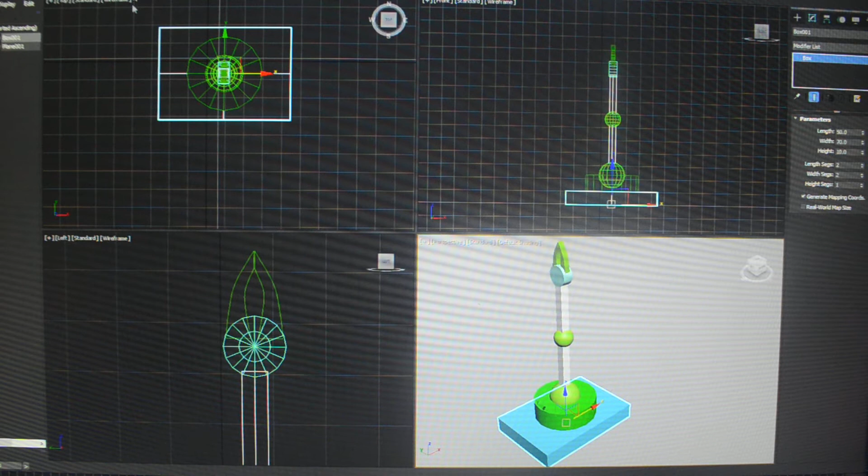Okay, so I fixed this, so now when I move the base, the whole thing moves. And all I did was I just selected this one, mirrored it, and kept it as a copy.

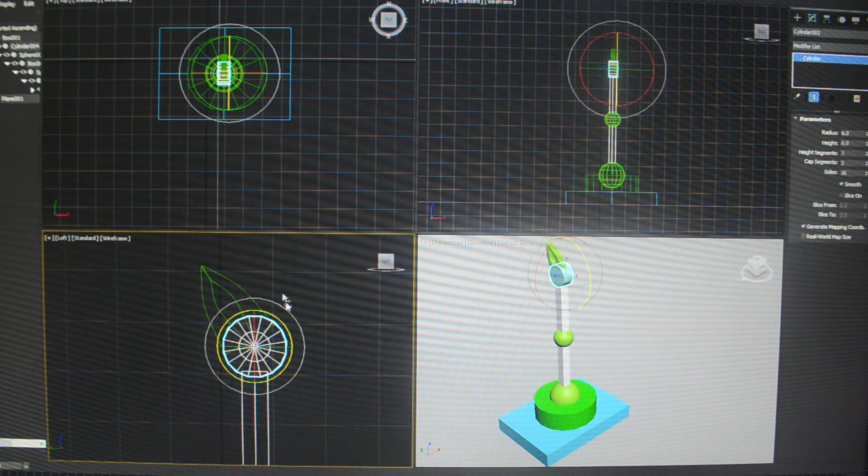Okay, so now that I have all of these connected to each other, I can move my fingers independently of my hand. So I can move the fingers like this. However, if I move the hand, the fingers come with it. And if I move the upper arm, it takes the hand and the fingers with it.

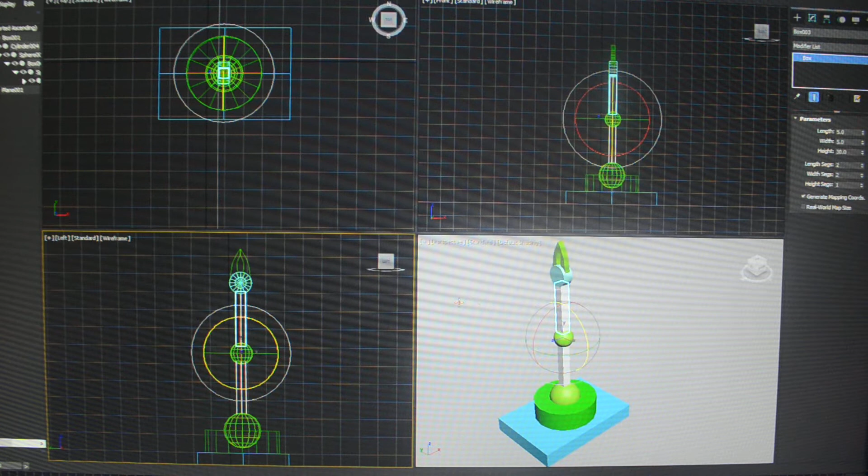And that is how I have rigged a system to create a functioning part. Now, this is not at all unlike your literal body, and I was using the term fingers and hands to make that analogy on purpose. You can start to look at things that way. So, for instance, my fingers move on their own, and my hand wiggles, but it stays in place. If I move my hand, I take my fingers with it. And this is exactly how this works, and this is how you want to link things.

You want to start with your fingers or your toes, link to the hands, your toes to your feet, your hands to your upper arm, in this case we have a ball joint, your elbow to your upper arm to your shoulder to your body, your torso. And that's literally how you're gonna link things in systems like that. You're going to start with a thing that moves independent of everything else first, and then link in succession down the chain, until eventually when this is finally all linked down the line, this comes with it.

Okay? So let's do a little bit of animating with this. It's tough. Don't beat yourselves up too much in the beginning when you start learning how to do this. You're going to have to get comfortable with playing around with it until you start to feel more comfortable with it. And you, like with anything, y'all know by now how I feel about this. The more you practice, the better you get at it.

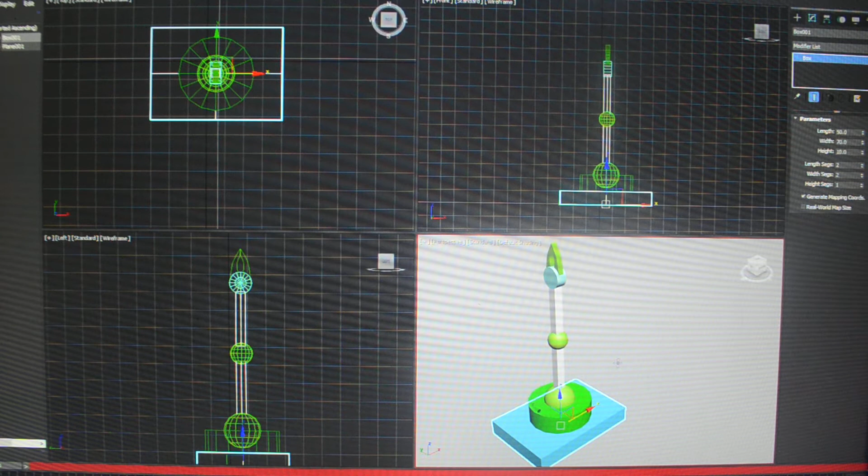So this is what I'm going to do. I'm going to turn on my auto key. And actually, well, I'm going to need all my views. Let's turn on my auto key. And I'm going to set a keyframe so that everybody is right here. Okay, so the first thing I want to do is I'm going to move to, let's say, frame 10.

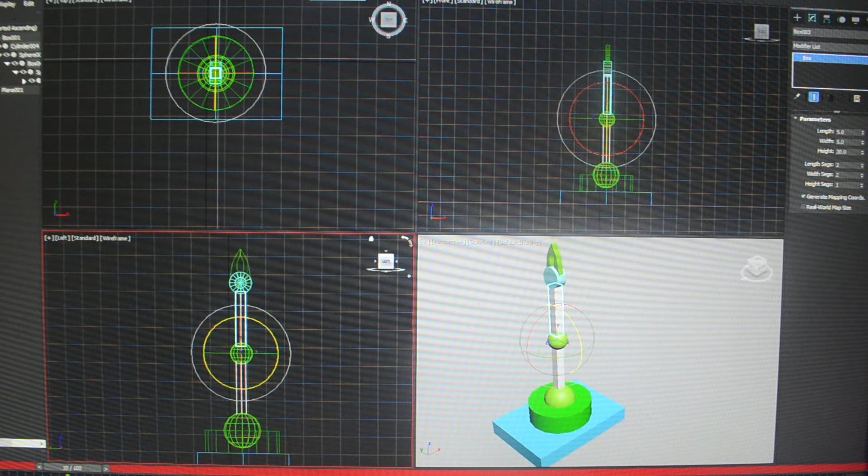Now, a word about incremental snapping. You can also turn on your angle snap toggle and it will allow you to rotate by 5-degree increments. I recommend you always work with this, because if I ever want to return this to its upright and locked position, I know that I can do it more easily by working with those perfect angles. If I just rotate this and later on I want to rotate it back, it's going to be virtually impossible to remember what I rotated it to in the first place randomly and then to get it back there without doing some math. So turn on up here your angle snap toggle and work with those snaps, okay?

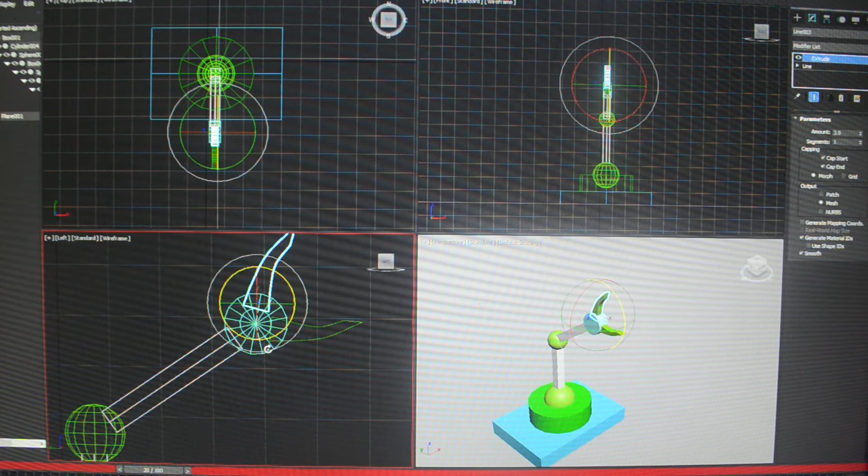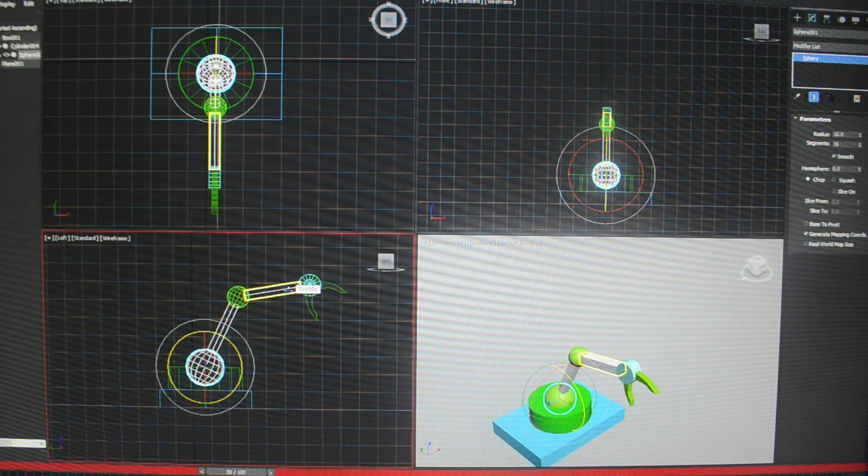So right there for 10, and then I'm going to move to 15, and at 15 I'm going to rotate open my jaws or claws, whatever you're going to call those, pinchers. And then at 20, I'm going to select my hand and rotate that down. And I'm also going to rotate this sphere down. And then at 30, let's make some more rotations. Rotate this further down, and rotate this further down.

And you see I could grab something if it was there. Straighten this back out.

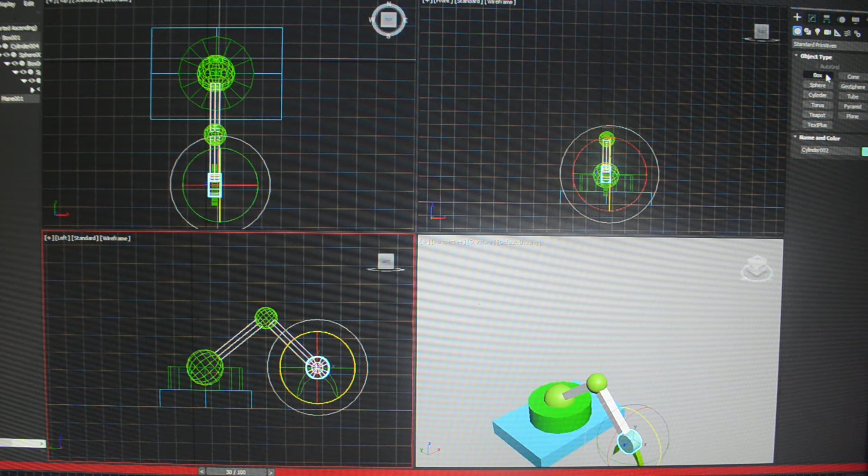Let's just do... oh, I couldn't find a box. Right, you can do a box.

You can now pick this up. Most people put the box there first. I put it there after, because it's a lot easier to put the box in now than to try to put it in later.

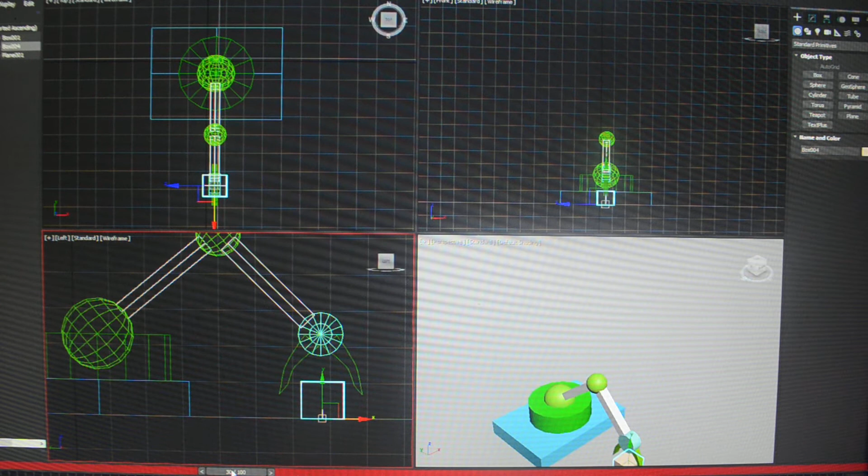Okay, so now, where's my box? I'm going to move it to here. I'm going to rotate those pinchers closed on the box. And don't worry if you go inside—you want to go inside the box a little bit. It's okay, nobody will know that you did that.

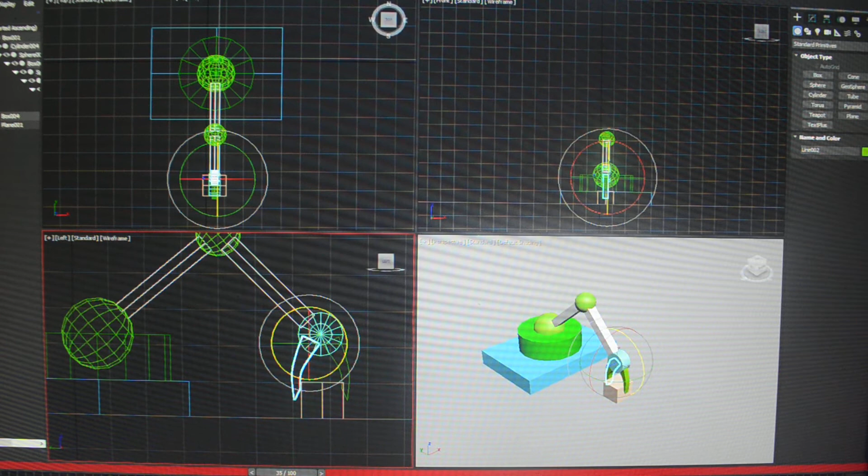It's more believable that it's like pressing the fingers than if you leave a gap. Okay? So that allows me... I'm going to turn this off, go back, and then play that through this animation.

Stop selecting that, scale this up. Whoops, wrong one. There we go. Okay, now let's watch and see what we've been able to do here.

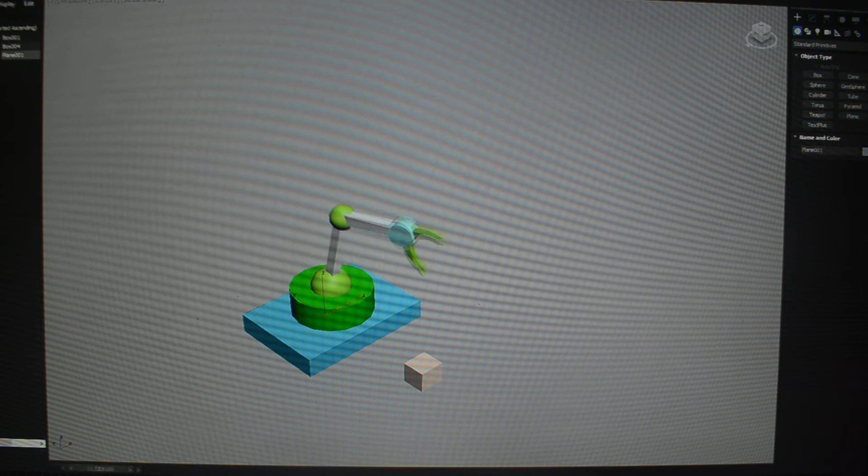Okay, so that is a rig. That's what a rig does. We can now use other techniques using link constraints to pick this up, and I'm actually going to show you in another video how to do link constraints. For this one, we're just focusing on how to set up the rig and how to then animate that rig. But this is considered a rig without bones—we didn't use any bones in our rig.

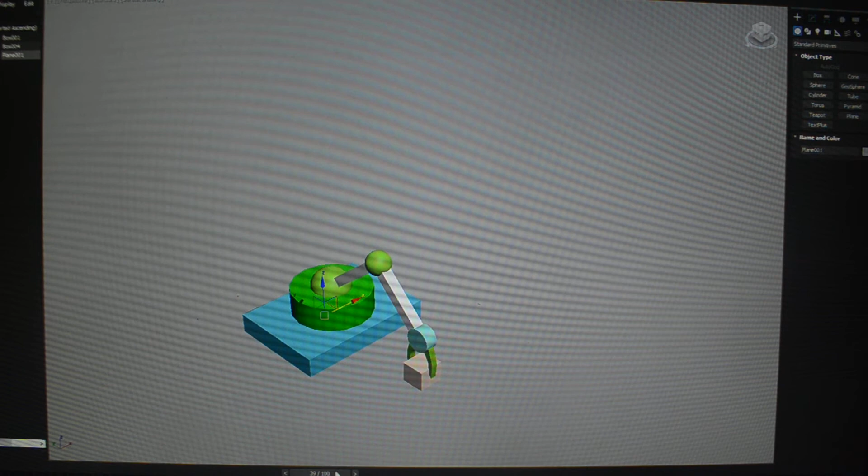Now, here's what I want to focus on in this video. I may not be happy with some of the movements, and if I'm not, I can make adjustments to those. So let's just say I'm going to incrementally move forward, next frame.

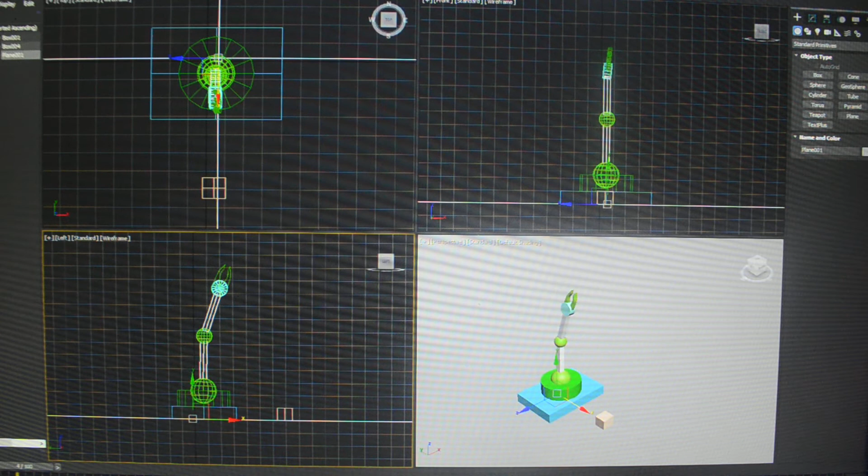Okay, and so I say at some point that maybe I felt like this needed to be adjusted or moved over—see, I'm on 20. Maybe it needed to take a little longer to get there. So I'm moving my keyframes around to smooth out, slow down, or speed up.

Remember, if you move it to the left, you're speeding it up. If you move it to the right, you're slowing it down. So if you're looking at the movements on your object and you're saying, okay, maybe that part is moving too fast, I want to slow it down—go in, select the part, here are your keyframes, shift it to the right. It's going to slow it down for you.

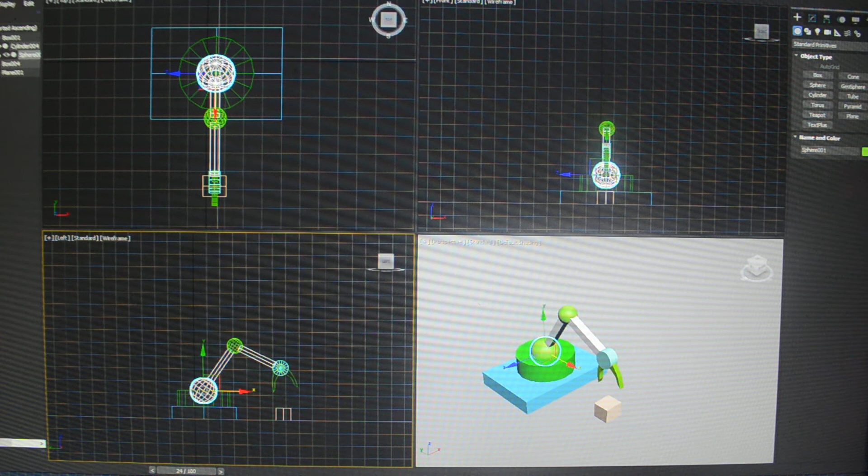Of course, oops, there we go. So it slowed down a little bit towards the end. It went quickly into motion, but as it got closer to the box, it slowed down because I moved my keyframe to the right to give it more time to create that motion.

And so when you're learning what the right timing is, you'll eventually get the hang of it. It'll just become unconscious, and your unconscious brain will just take over, and you'll just know how to move it. But right now, while your eye and brain are trying to learn how to coordinate with the computer, make an attempt at it, and then evaluate it.

Take a look at it. Do what we call in industry a post-mortem. When you're done, look at it and say, how could I have fixed this? And one of the things is usually I want to speed it up, or I want to slow it down. Just move those keyframes around, and that will do it for you.

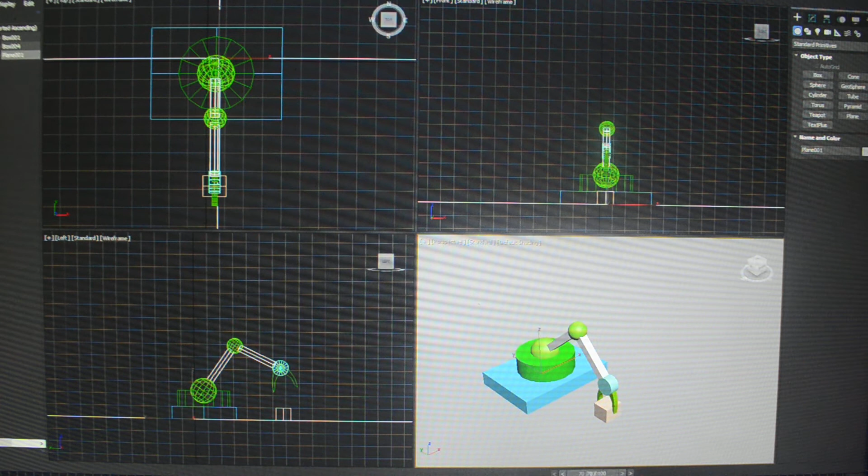Okay, so in the next video, I'm going to show you guys how to do something called link constraints. We're going to use link constraints to do temporary linking. Okay, see you there.